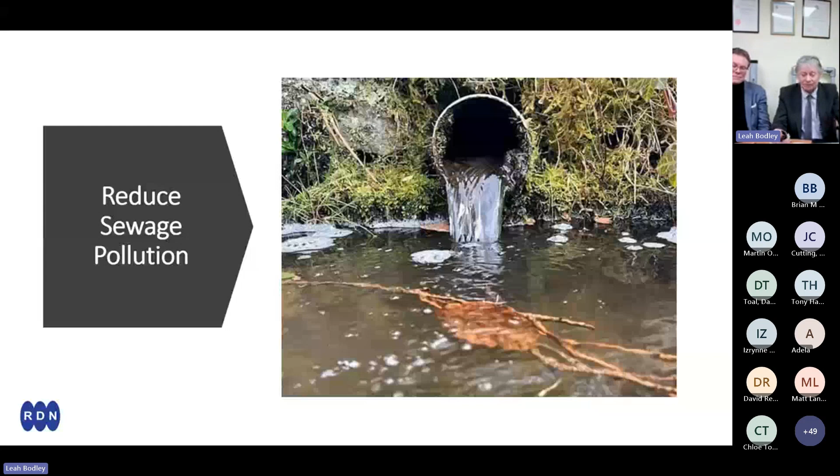So we wanted to find an effective and inexpensive way of controlling and managing flows into the network, which didn't include large capital construction such as building pumping stations with wet wells, etc. One key concern, very prevalent at the moment, is the need to manage and, if possible, reduce sewage pollution. There's an Act of Parliament in motion, with water companies having to focus very carefully on how we manage and control what leaves the CSOs, combined sewer overflows, and we're looking for all ways and means possible to reduce the operation of overflows that are affordable and effective. One means of achieving that is by putting flow control valves into the system.

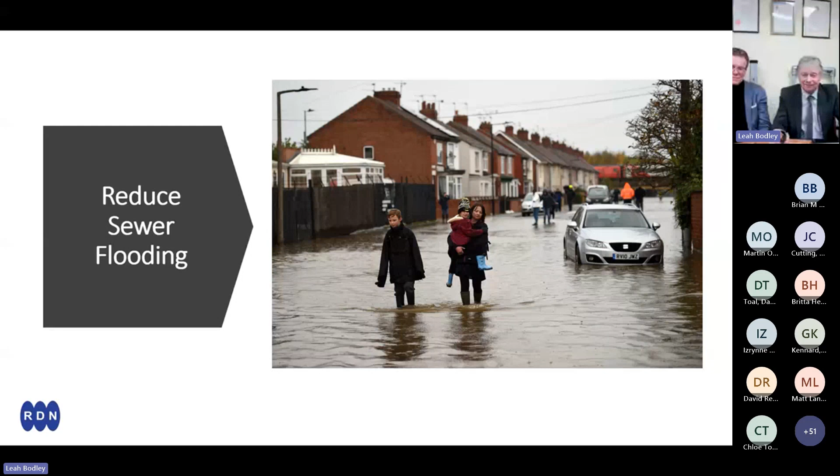A secondary benefit is if we can reduce or manage flow better within the sewer network, potentially we can reduce and better manage flooding. Flooding is very, very important; we want to reduce that wherever possible. And with climate change and the difference in weather patterns over recent years, it's something we have to keep front of mind.

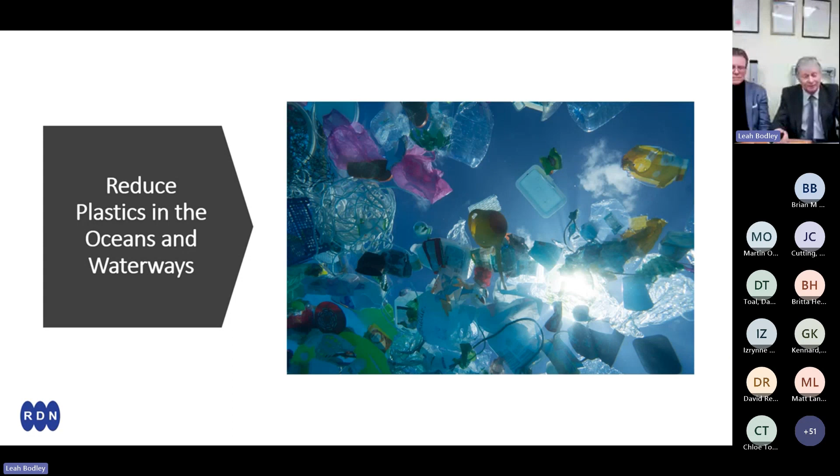One further issue we have to consider is what passes through the sewer networks in terms of things like microplastics, inorganics, organics, pharmaceuticals and other things. The ability to control and manage the flow in the sewers can mean that we can contain and curtail the operation of overflows, preventing some of these pollutants leaving the system and passing them through to our works for capture and treatment. That's a serious consideration. Ultimately, what we want to do is improve water quality.

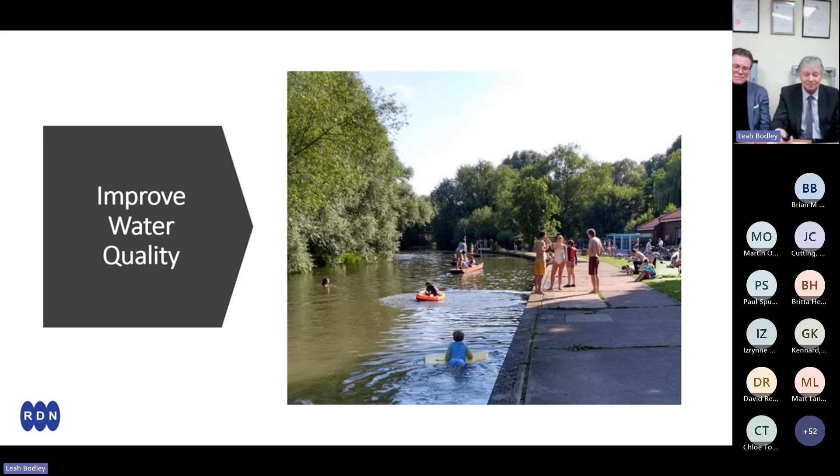We've worked with groups across the Anglian region, and the intention is to better manage our sewers where possible with low-cost, effective solutions to enhance the environment, particularly collaborating with the users of rivers and bodies of water so that they are aware of what we do and how we do it in a better, more sustainable fashion. The state of play within water is that in 2020 sewer CSOs operated more than 400,000 times, which isn't a great state of affairs.

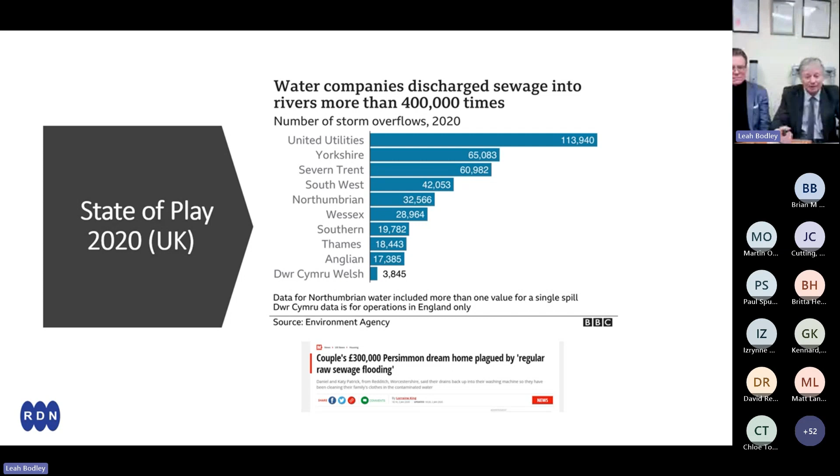However, as they are necessarily release points for the flows in sewer systems, we don't have any alternative, but we can do better in terms of controlling, managing things like first flush component and keeping a lot of the contaminants that otherwise might escape within the system, and the control valve arrangements that Brian's come up with can help us achieve those end goals.

So the particular case study of interest that we have is a place called Burnham Road at South Woodham Ferrers. It's a small town, and the case in point was that there was a development of a commercial and healthcare arrangement where we have an Argos and Sainsbury's being built, which obviously gave rise to an increased flow from that catchment, subcatchment, into the existing main sewer, which was already hydraulically overloaded.

The valve was a very suitable and appropriate way of managing and controlling flows, and Brian was asked to investigate the opportunities to site and locate that valve, design the valve to suit the purpose, install it and make it operational. I'll hand over to Brian, who can talk about the design challenge.

Well, thank you, David, for setting the scene. As David mentioned, it is an absolute challenge, and what we're up against when we set these sort of challenges are we have to make everyone, all the people in the industry, happy and content that what we're going to do is not going to make a bad situation worse.

And also, if you look at the ingredients to make success out of this particular project, we've made it akin to a cooking bowl. You're putting the ingredients in the bowl, and these are basic things that you will need to make sure the project's successful. Obviously, the overarching thing is it has to be affordable. And affordability comes out of how we implement the design, so how we approach this whole concept.

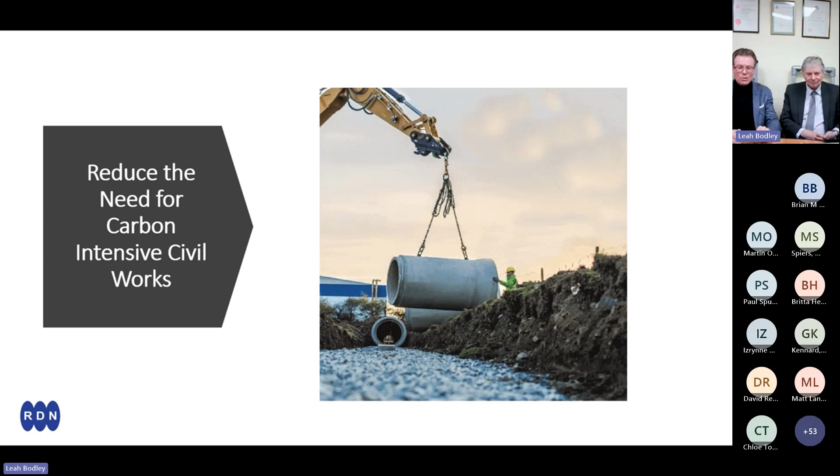One of the key things also is not to go down the route of civil works, because it's easy to say, oh, just make sewers larger to take all that extra load. But even if you did all of that, apart from the carbon intensity of doing that particular part of the process, you then move the problem to the works, which then cannot cope. So it's not a simple solution.

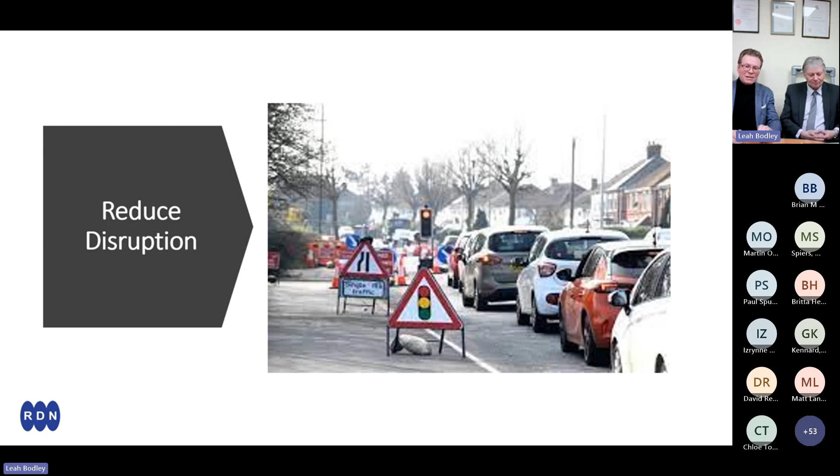What also is key with these types of projects is to implement a design where you don't create disruption. What you don't want is lots of days of civil works, digging up roads and so on, to put new sewers in or new chambers, because that's very expensive and also causes bad relationships with neighbours. One of the key elements also in this design philosophy was to eliminate the need for overpumping.

Now, David mentioned South Woodham Ferrers as an example. When we actually arrived first on site, the chamber had already been constructed, and this was a sort of an afterthought. Before the store could open, the flow had to be controlled. So it was a case of installing this equipment in a live working sewer without having to overpump and bypass, which is very critical.

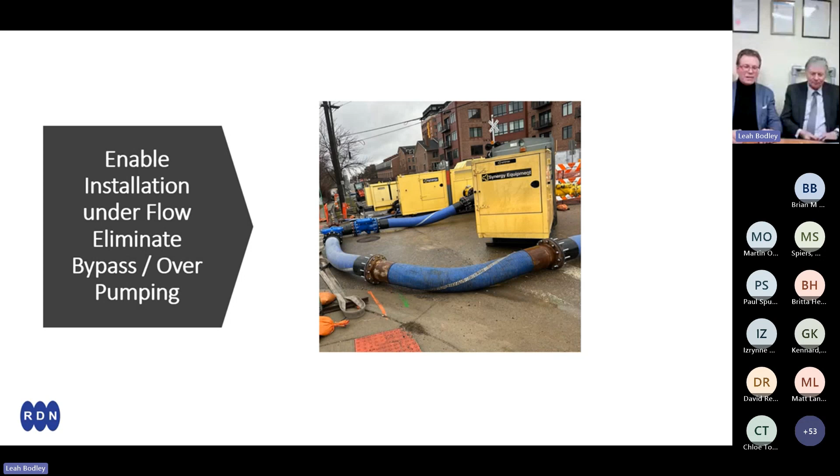And also with the design philosophy, we had to make something very space efficient, because if you start occupying land and territory, you're going to then reduce the space available for affordable housing. So there's lots and lots of constraints coming out of here.

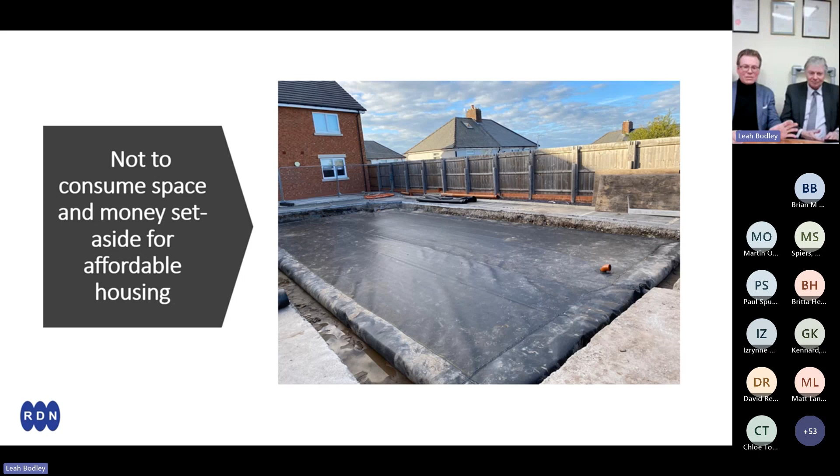The current thing, of course, which has occurred since we started this back in 2018, is low carbon. This has become even more so, and that covers the entire process, from a cradle to grave philosophy, from the design, the manufacture, the installation, the operation, right up to the end of life.

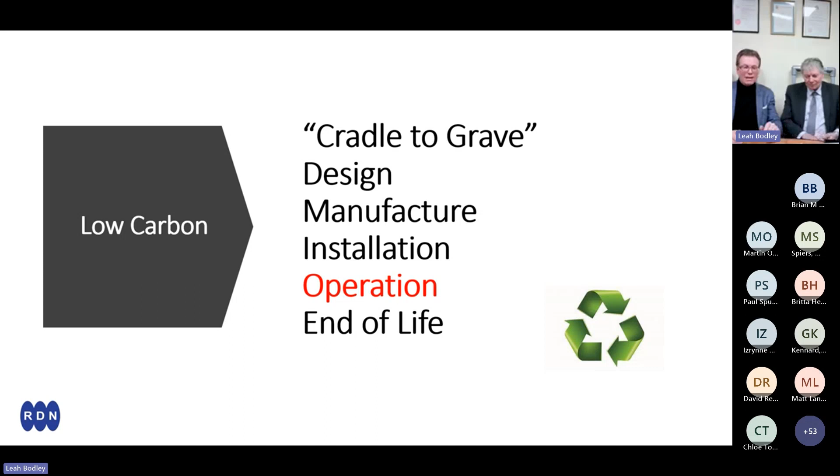And what goes hand in hand with this, which is one of the learnings we had from one of the previous projects we built for Anglian Water, was the need to eliminate mains power at the point of control, and also the point of sensors. With the first ever regulator we built back in 2018, we found one of the biggest constraints was getting mains power to the location of the kiosk.

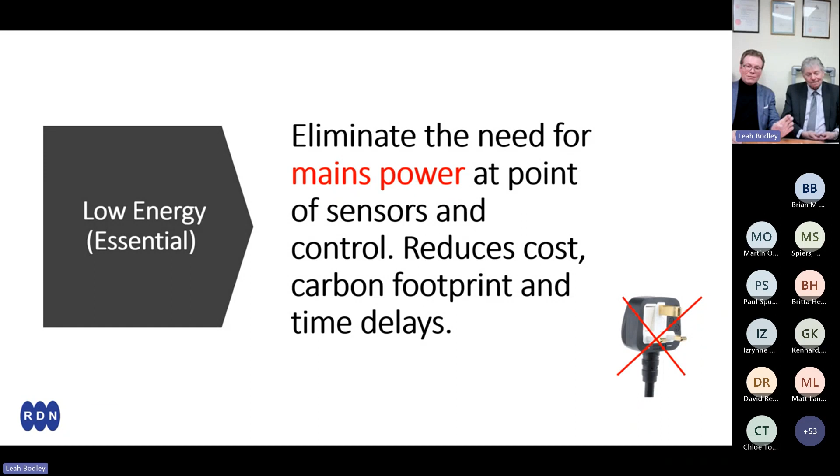So this was a major constraint we've addressed by making everything, as you'll see later in the presentation in the demonstration, solar operated. So it means you can install these types of interventions anywhere, and actually then have a long-term low carbon footprint in operation.

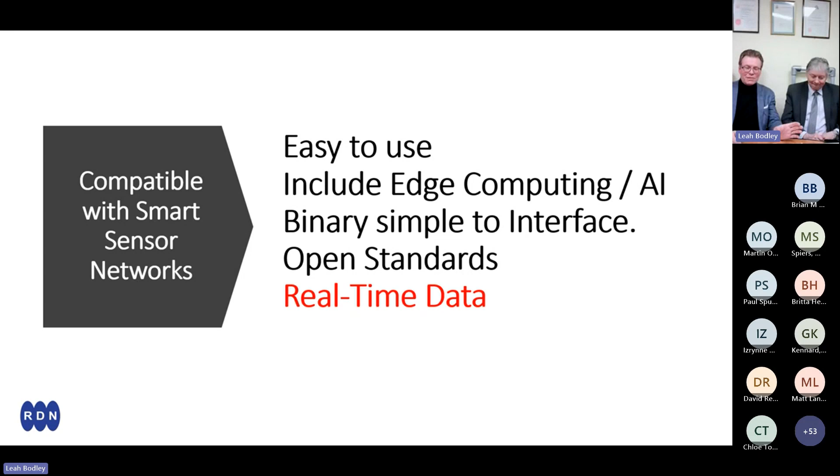One other key thing is everyone talks about AI and smart sensors. The means of control, when the level is high in the sewer, you want to inhibit flows, restrict the flows and so on. One of the key elements is, of course, in red at the bottom. You need real-time data, but also you don't want to restrict what type of sensors used. Sensors are in evolution, so it's an open standard for the control method that can control this type of regulated device we're going to talk about.

And the final thing, it must be fail-safe. The whole design by its nature has to be fail-safe. If something was to go wrong, you must not make the situation worse than it was.

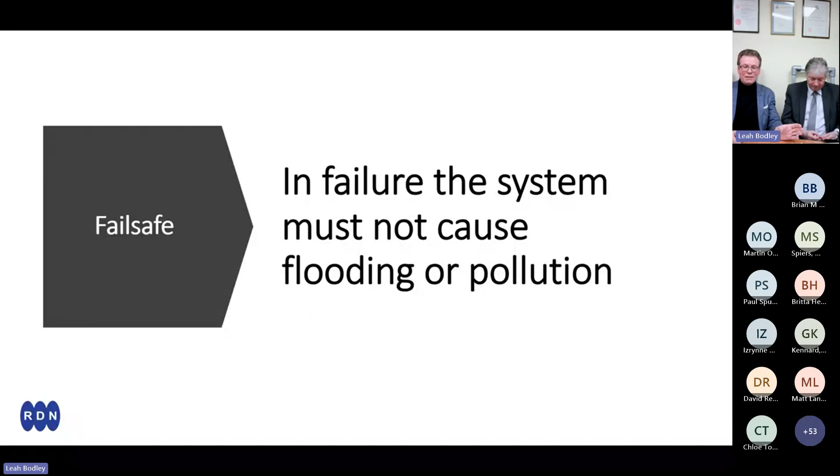And intrinsic safety goes without saying. Where we have high septicity, there could be a potential risk of explosive gases in the sewer networks, so ATEX, or UKEX as it's called now, has to be considered. Cyber security is also important, which leads on to something we're going to talk about as well.

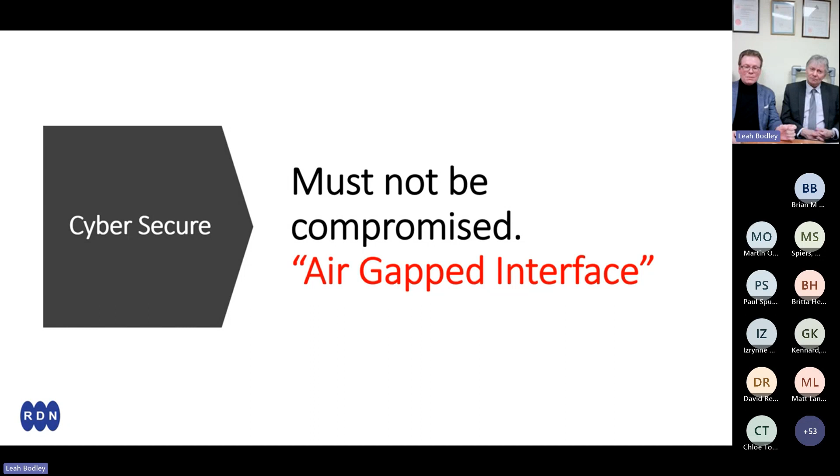The system needs to be autonomous in operation, so it's not dependent upon the internet, which also gives you a guarantee of longevity, because technology will move on. As you would see in the cellular networks, you can't rely on a thing to be static for very long. But if you make an autonomous system, you have the ability for it to operate on its own from now and into the long distant future without the need to change too much.

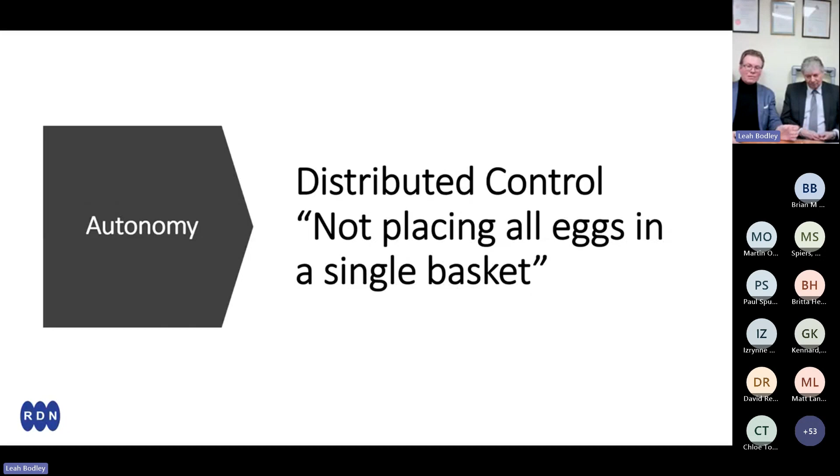As I would say, don't put all your eggs in one single basket, because you don't have a central control. Have a distributed control at the point in the network.

Another thing that's very important, and it has always been stressed to us, is the minimal need for maintenance. This is something we've tackled. We've reduced maintenance because the actual device, you'll see in a moment, is a self-cleaning product, but also it has the ability to be removed from the network without the need for confined space entry for cleaning and test.

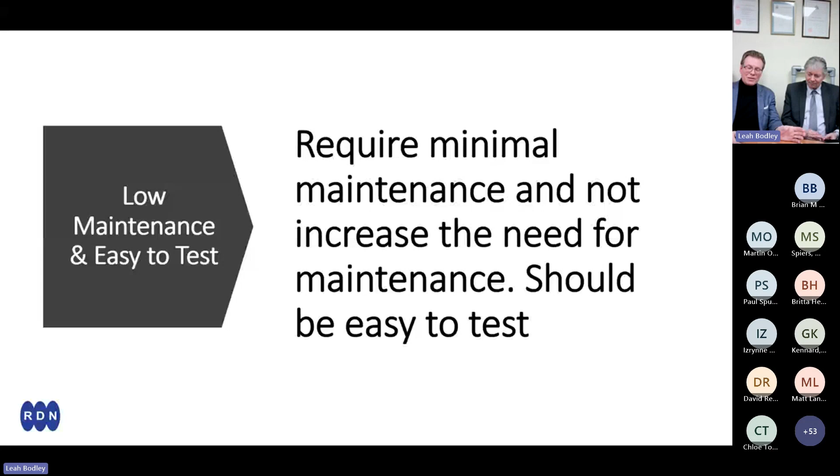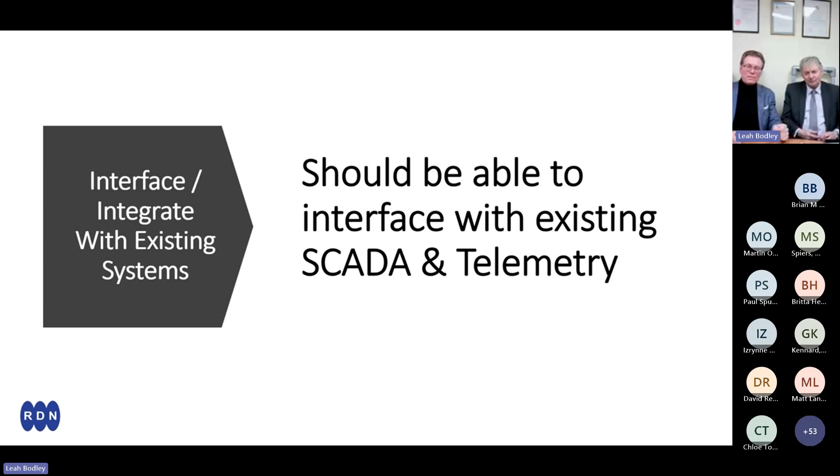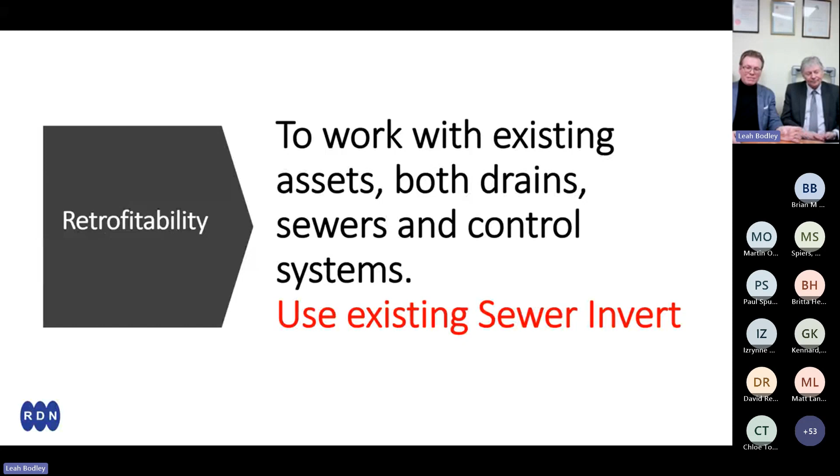And finally, we have to interface with existing SCADA and telemetry so the utility can get feedback about the operational status of the device. And what goes without saying, retrofitability, as in the case study David just mentioned about working with existing systems, is key, because this was already built as a sewer network. We had to retrofit into the existing sewer chamber.

So I'm introducing you now to what we call the wastewater flow regulator, but most people in the industry seem to call it a sewer flow regulator, which doesn't particularly matter. It has actually been granted a GB patent back in 2022. And the theory is as follows.

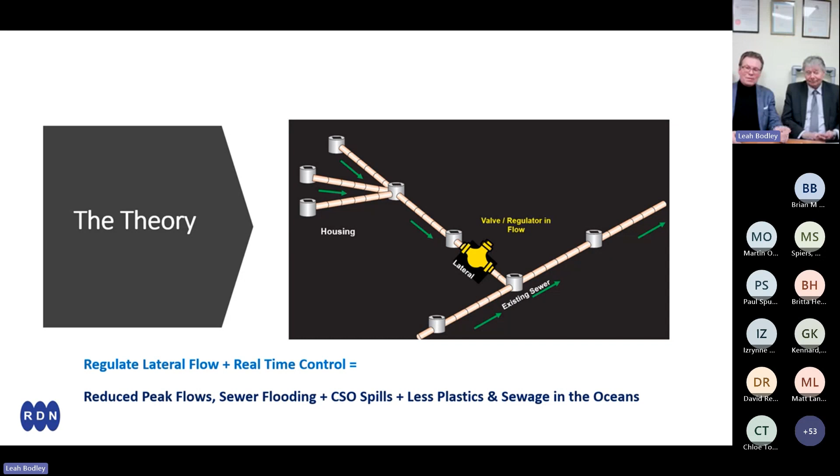So if you took the example of the Southwood and Ferrers development, where it says up on the left-hand side housing, there's a picture in the yellow of a regulator valve. You've got the point to open, you're then restricting the flow back into the main sewer. And this is the actual part that fits into the sewer - this is the sewer flow regulator. You have a body at the top, which is placed into the sewer over the benching and the invert.

One of the key elements here was that we didn't want to be invasive. We didn't want to create any issues about the potential for ragging, so no discontinuities. This is where we differ substantially against a penstock, which would require a frame and a new chamber and a weir wall to be created.

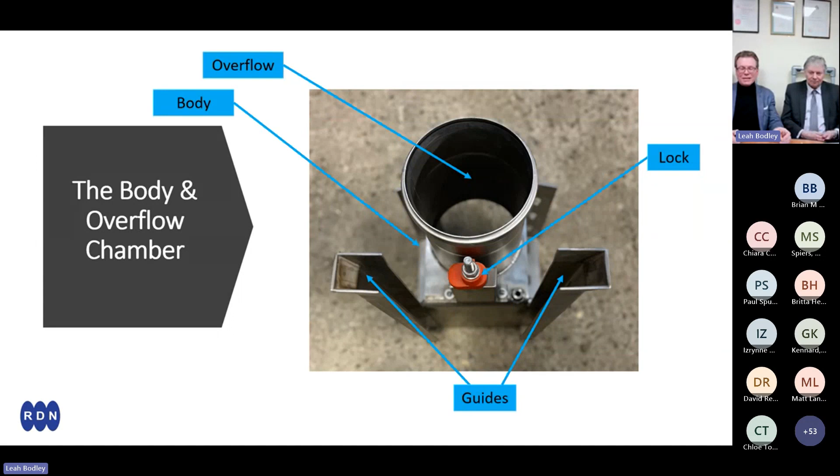This actually utilizes the existing chamber, the existing invert, the existing benching, and is designed to fit the actual existing chamber and the benching and so on. It's got two guides in there, which let the control element, which you'll see in this picture here, be inserted and removed for servicing too.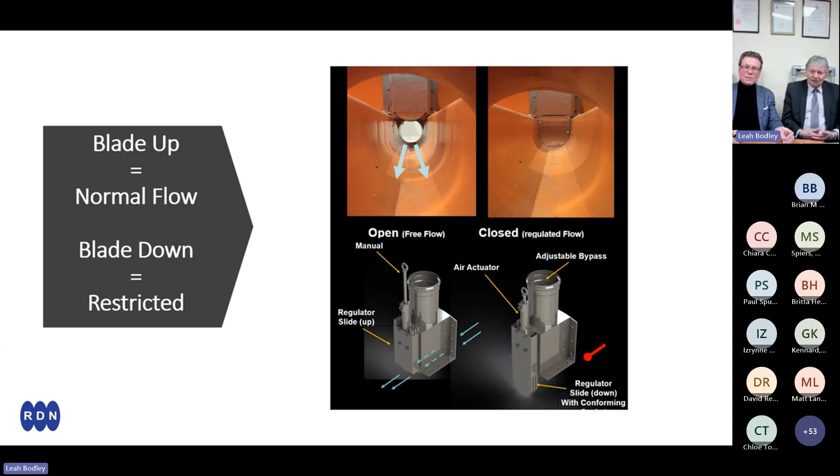As you can see, it's like a tongue that's gone into the invert, and it's actually using the base of the invert as part of the seal. So blade up, open flow; blade down, restricted.

Now, we mentioned the need for solar. That's absolutely paramount, and that's been used on the majority of the flow regulators installed to date. It gives the ability to install them virtually anywhere.

The only constraint is you don't want to be overshadowed by trees or tall buildings. But inside this particular control kiosk, you've got the solar panel at the top, and the sequence control that actually controls the operations of the actuator underground in the chamber. This one includes radio telemetry, which talks to and from the wireless sensor down in the network, and also back in this case to Anglian Water's telemetry too. It also has manual local controls, so you can test the unit on site as well.

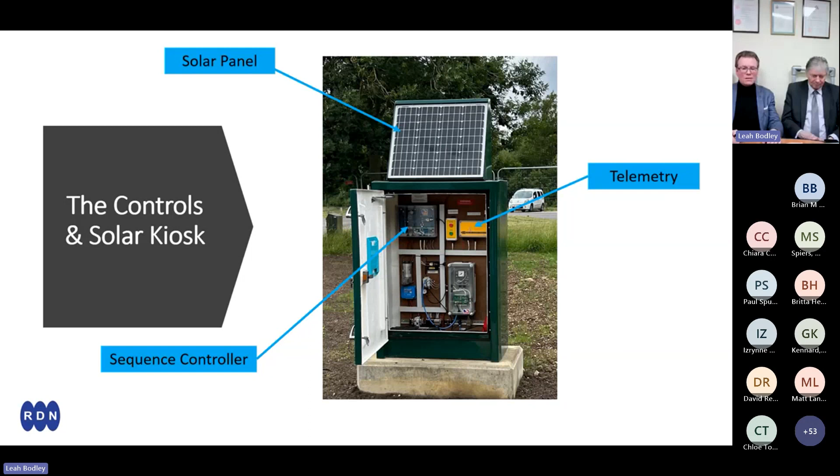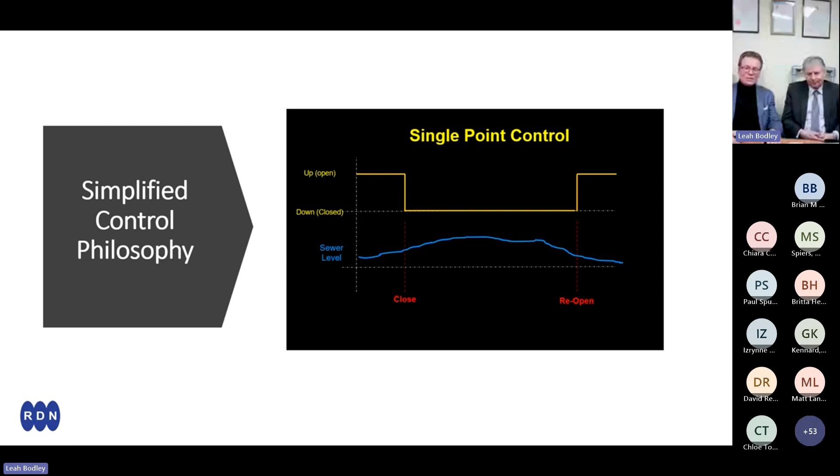If you look at the control philosophy, it's very simple. Take the case of an analog level sensor, such as a Vega radar in the sewer, perhaps a kilometer away. Radio telemetry would bring that level back to the control point in the controller, and a threshold would be set upon which the regulator blade opens and closes, inhibiting or enabling the flow. In the open position, the flow is enabled; in the closed position, the flow is inhibited.

So if you look at typical system topology, on the right-hand side you have a level sensor. It could be any type - the system is very agnostic. It could be a float switch, a velocity sensor, or a higher level radar with a trip amplifier. It can be any type of sensor; it's completely agnostic.

The flow regulator could live several kilometers away at the actual point of the new housing development, for example, or the new industrial or commercial estate. The control point is then implemented to reduce the flooding potential at the hotspot.

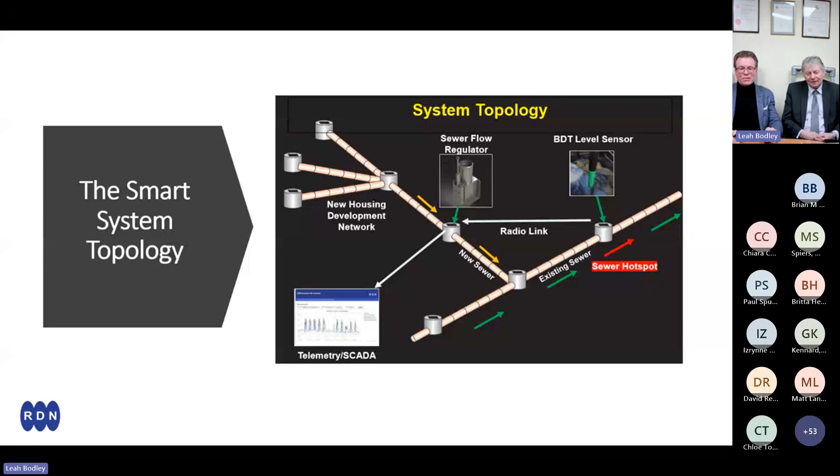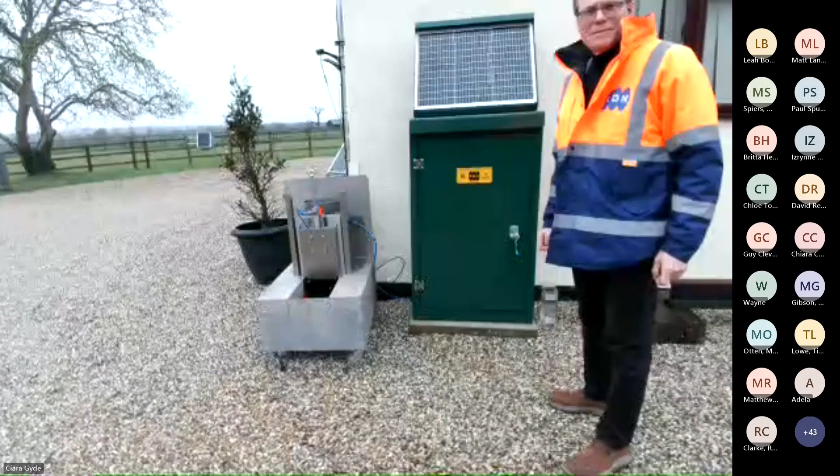Okay, well welcome back to the Innovation Farm. As expected and predicted, it's raining again. And we're going to start off with just showing you typically what the installation would look like above ground. This is a typical solar kiosk, but excuse the rain of course. And this is basically inside the one you saw in the picture earlier.

What we're going to do, though, is actually run a live demonstration, because it's a little bit more challenging - inside our innovation barn using a flow rig to simulate an actual flow regulator. So ignore this for the moment. We're now going to go inside, so follow me through with the camera.

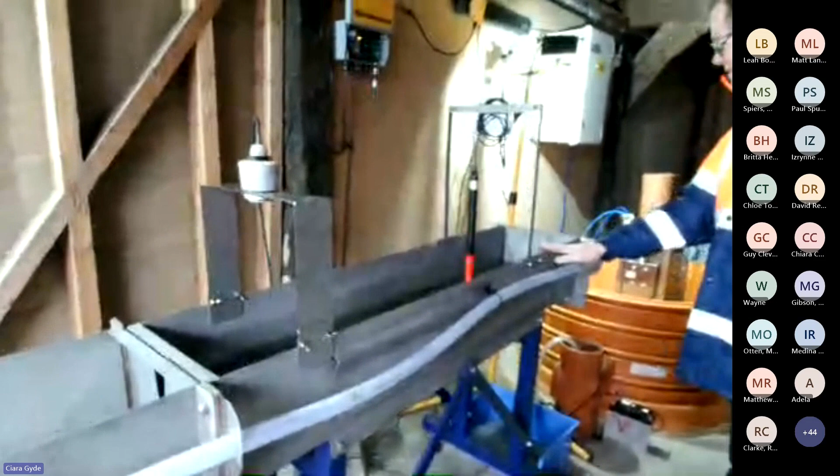Innovation test rig area. And I'm going to introduce you now to a - so this is going to be our main sewer, which has a capacity problem. We'll start a little pump here to illustrate the fact that the sewer level is rising.

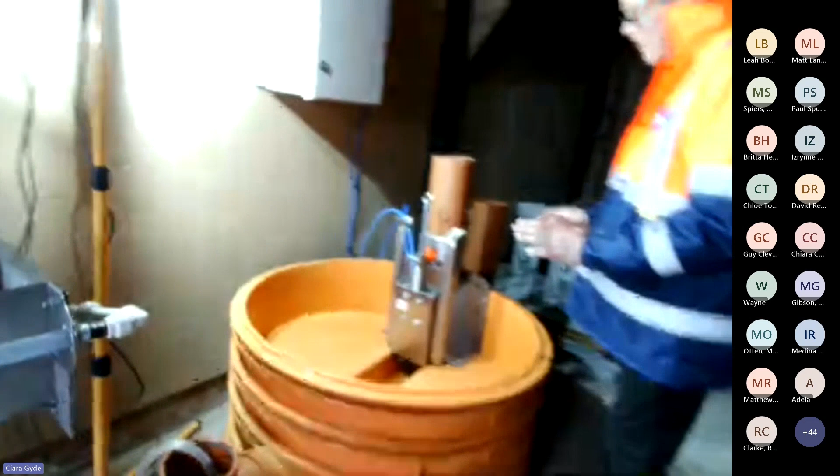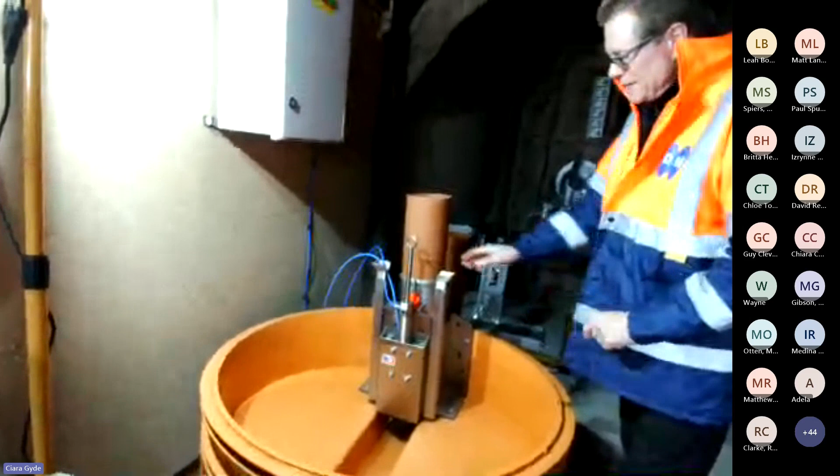So this is going to be our main sewer. Over here on the right is a flow regulator. This is a 150mm one, actually built into a plastic invert for ease of demonstration, but the inverts can be concrete too - they don't have to be plastic by any means. This one will actually show you how it's built and installed correctly.

And what we're going to do is show you how this system works as a real live demonstration. So we've taken the controls out of the green kiosk and shrunk it into the compact version, which is the one we use if we're going to install the controls inside someone else's kiosk. If there's an existing kiosk by the side of the road, they can go in there too. So it is actually quite a compact installation.

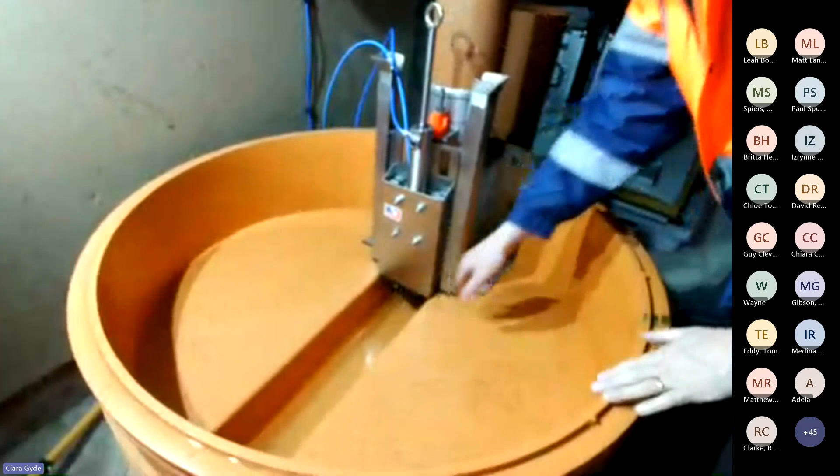What's very key about this installation is the flow regulator sitting over the invert. As you can clearly see down here, there's no discontinuity, nothing changes itself. So the chance of attracting rags and so on is minimal.

We're going to just make the demonstration more realistic here, because what we're going to do is put a flow on in our sewer. You can actually see we have now a flowing sewer. Obviously, as you can see, the flow is going through here unabated. You have an overflow pipe here should things go wrong, so this is cut off to the height of the store point.

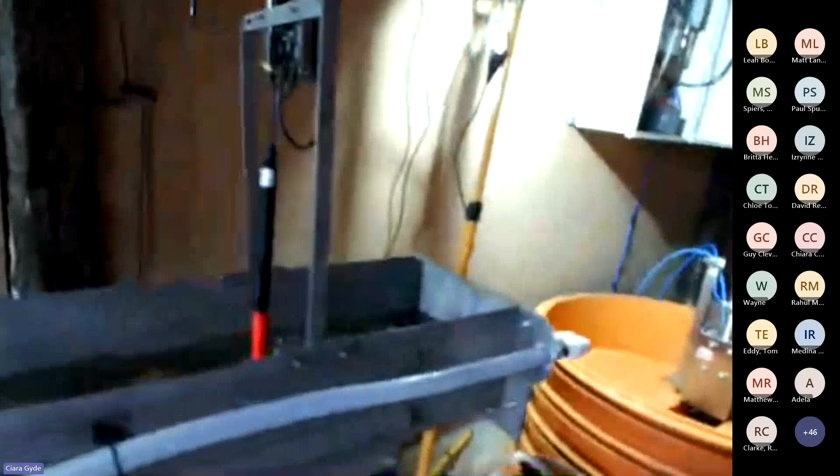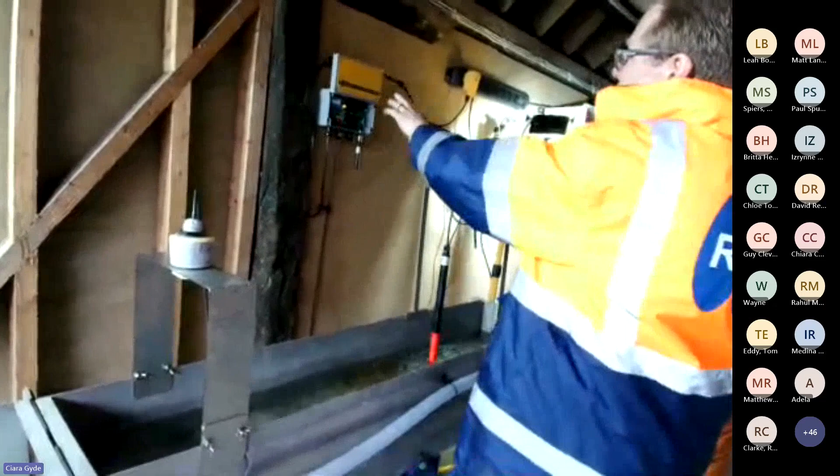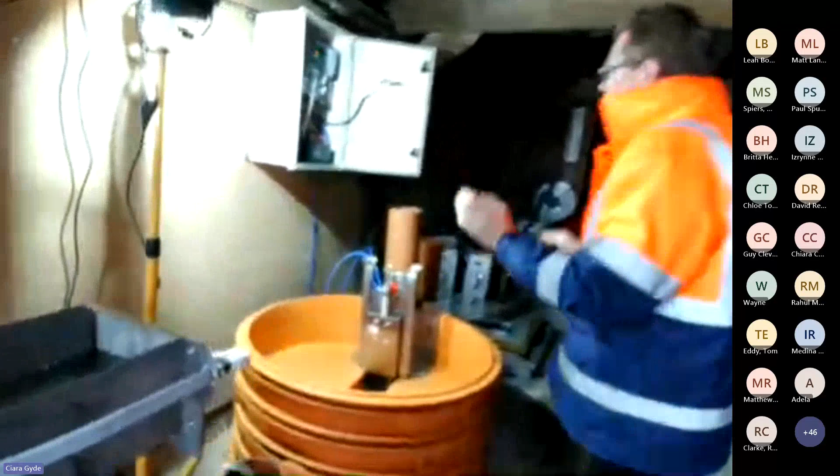What we're going to do now is let the sewer level on the left-hand side rise. What we have in the sewer here could be any type of sensor, but first we have a Vega level sensor connected to a radio telemetry transmitter. Every time you see the blue LED flash, it's taking the latest level and relaying it wirelessly back to the control kiosk. Technically speaking, this can work up to 5 kilometers away. The level's been reached now.

The level in the sewer has reached the threshold. The green light that was on here has now gone red. What you see now is the flow has been restricted by the regulator, which has closed in the invert and is sealed. Now you can hear my little electric pump running dry because it's been starved of water, so I'll switch this off here.

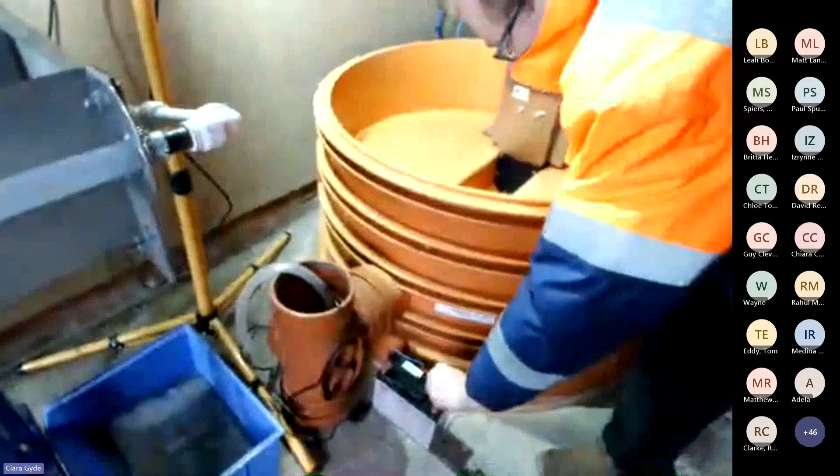Now what will happen is we'll ask the team over here to switch off the pump and let the level recede in the main sewer. Just imagine that the rainfall event is now finished and the level is going to gradually drop.

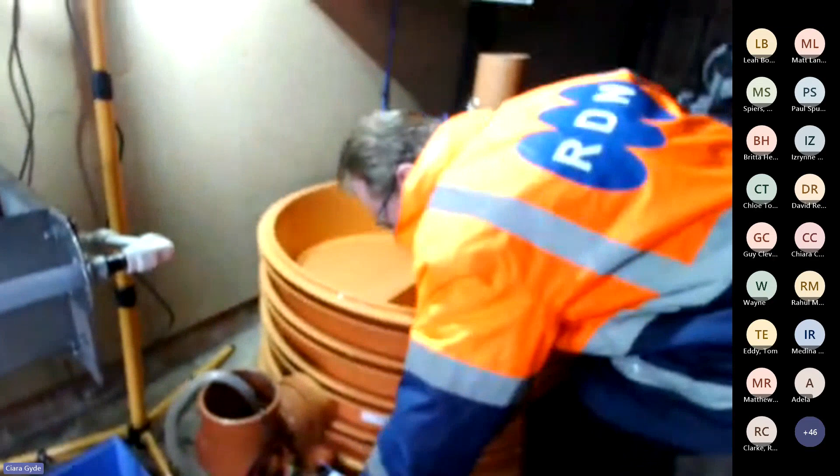As you can see, the flow was retained and now has been let go, so we're back into a flowing system. We can run around the system again, and you can see now we have an unobstructed flow path.

But what you've also got is the ability, when this is in the raised position, to remove it for service from the surface. You have a long key and two hooks that go either side, and you can lift the regulator clean out of the actual frame. The frame stays in place, meaning you can service this from the surface. This works particularly well in shallow chambers up to 2 meters - you can lift the regulator out and lower it back in for service and maintenance should that be needed.

The other key point, which is part of the patent, is the fact that if this was ever to get stuck, you have the overflow weir here, which is a standard piece of plastic pipe cut off with a spill point. You cannot surcharge upstream should anything go wrong. So that's basically the system in action here.

This is the flow, and we can take you outside again if weather's permitting.

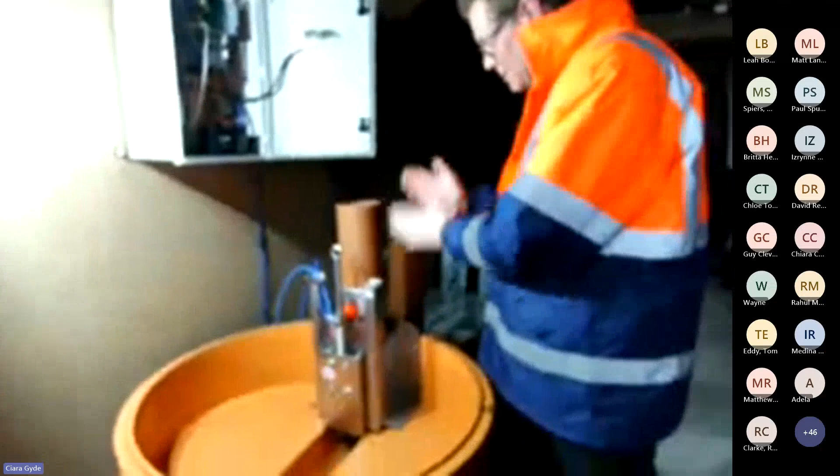My colleagues quite rightly reminded me - we have been asked, can this be used for flushing? And indeed it can, because as you saw, if you close it in this flow and then reopen, you get a flush, which is great for first foul sewage removal. It helps to reduce that particular problem, so you do have an extra benefit of having the system in here.

Alternatively, this blade doesn't have to be a full seal, it can be partial. About 50% of regulated designs that are either proposed or installed aren't restricting the flow totally - they're providing a partial stop. People have said this is a better and safer alternative than using a hydro brake, which for small sewers could be quite small and is liable to clog. So there are certain aspects and benefits of this design above and beyond what we originally conceived.

So if we walk back outside, weather permitting, we have a second live demonstration.

This is using the kiosk outside, and this is totally a solar powered operation. This has been out here for several months, waiting to be demonstrated just to prove the point that solar is very viable, even in the UK. In fact, most of the systems we have out there in service since 2018 have been running successfully on solar.

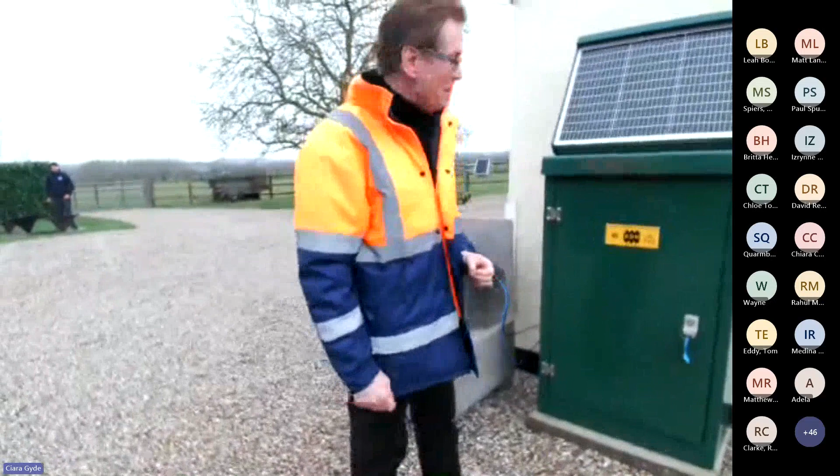I'll open the door briefly because of the rain, of course. I've got a colleague over in the chamber over the distance yonder, and he has got a float switch. We're raising the float switch up, and that has now been relayed by radio telemetry to the chamber.

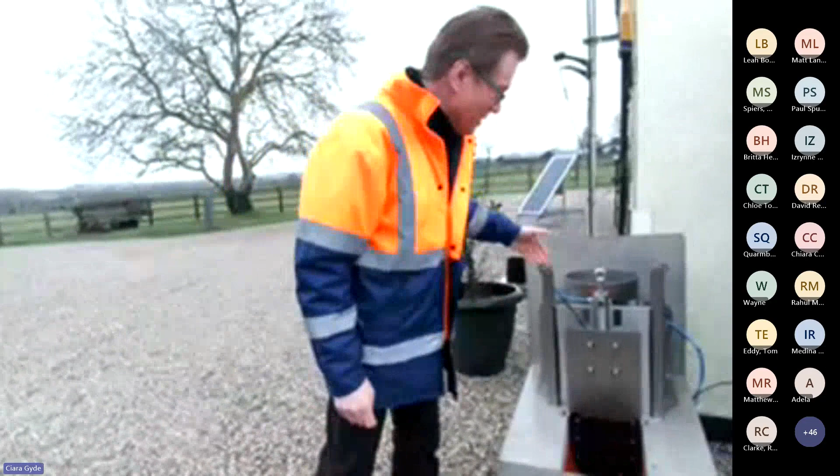That now goes to the regulator, which has now actually got some water in it thanks to the rain. So this was going to be a dry demonstration, but it's now a wet demonstration. We've actually got a level in the chamber.

This is a larger model than the one you saw earlier. That one was a 150mm unit; this is a 225mm, exactly the same principle, same scale. Important to note is the shape of the back wall - this one's a square back wall, that one's a different back wall. But we actually custom manufacture these to order to suit any back wall or any angle as they come out.

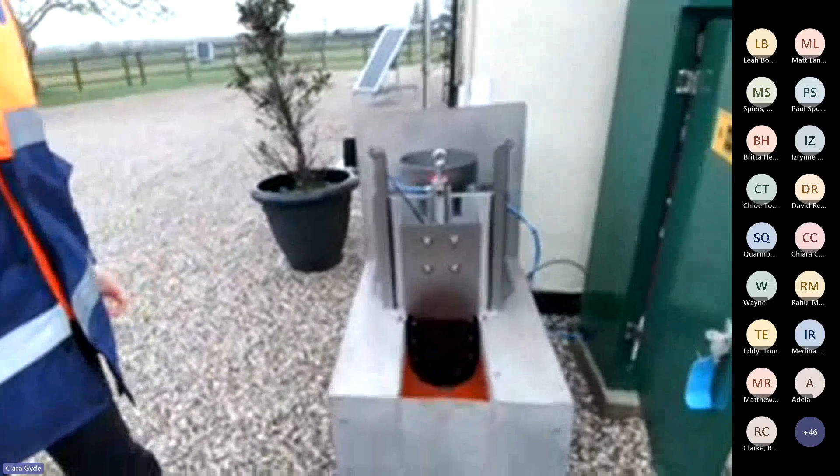If you could kindly lower the float, please. So we'll have the regulator open again. There's always a small delay waiting for the telemetry to work. There we go - you can hear it click over in the control kiosk, and it just takes a few seconds, and then the regulator blade lifts.

So as I said earlier, it doesn't have to be a full closure - it can be a partial closure. And the larger the invert, the better they are when it comes to using partial closure devices. As you can see clearly here, perhaps clearer than the version inside, what we have is no obstruction whatsoever in the actual invert.

That's very key. Now that really ends the outside demonstration - a live demonstration that actually worked. Often with demonstrations, whatever else happens, something always goes wrong. Today, apart from the weather, everything went fine.

So thank you, we'll now move back inside. Welcome back, I trust you saw the live demonstration outside. A little bit wet now thanks to the rain, and a little bit smeared up on my glasses, but that's one of those occupational hazards with the UK.

What we are going to do now is move on to - we have a slight technical hitch. Okay, the mouse is now working.

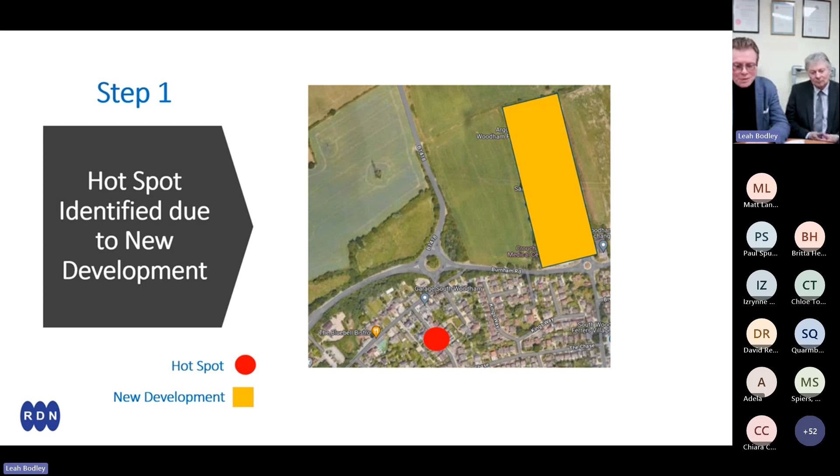And you have this sewer hotspot. We've illustrated earlier that radio telemetry can be used to control the regulators, and indeed it was in this application. It's about 1 kilometre as the crow flies between the hotspot, in inverted commas, and the housing development. So if you're planning this type of intervention, the first thing to do is identify your hotspot and then work out where you want to put the controls.

One thing that has to be emphasised with this new development is that Anglian Water were fortunate to get in early on this development to actually specify or suggest to the developers that they build these sewers with slightly oversized pipes, because apparently laying 300mm sewers compared to 150s was negligible difference in cost. Obviously, you've created larger capacity by doing so straight away.

And then the challenge is restricting the flow on the outflow. The options of having orifices and hydrobrakes and so on weren't viable, so we're back to where the regulator comes into its own.

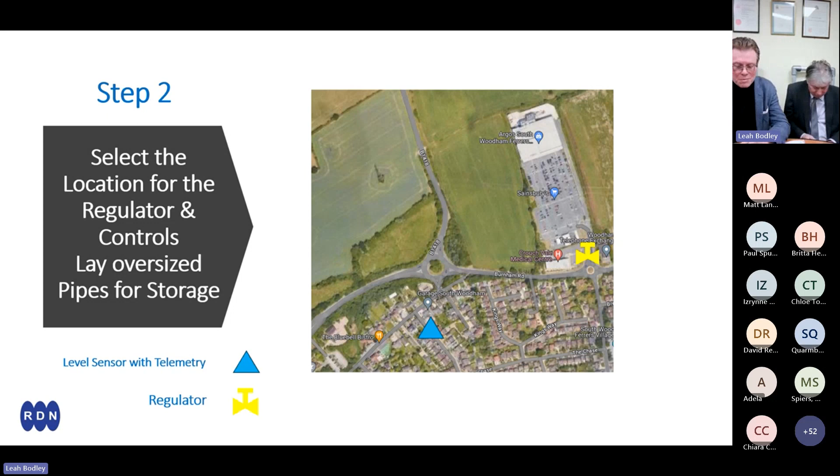So you can see in the illustration here, we have the yellow valve symbol illustrating the point where the site exits and joins the main sewer, and the blue triangle indicates where the actual sensor was put into the network to determine the level.

The challenge then, if you take this as a sequence, is you have to measure and obviously find the actual - first and foremost you have to make sure whatever you design will fit through the existing covers, which is typically 50 centimeters. That's your first overall constraint.

But the main constraint and challenge is actually fitting the invert, because as you can see, every invert's different. It's not as straightforward as the illustrations you've seen earlier in the demonstration. These are not perfect inverts by any means.

So the things you have to gather: make a template of the shape of the invert, so someone will have to template it. You have to determine the angles and also the position relative to the actual chamber, because more often than not the actual inverts will not run necessarily through the centers of the chambers - they're slightly offset, or can be. Also, the angle at which they enter and exit may not be at right angles to the chamber, but all of these can be taken into account with the design.

The final point is to determine the critical height you can tolerate if something should go wrong. As I showed you in the demonstration, the overflow pipe is set at the height where you cut it off to prevent spills and surcharges back upstream. So these are things you need to gather at this early stage.

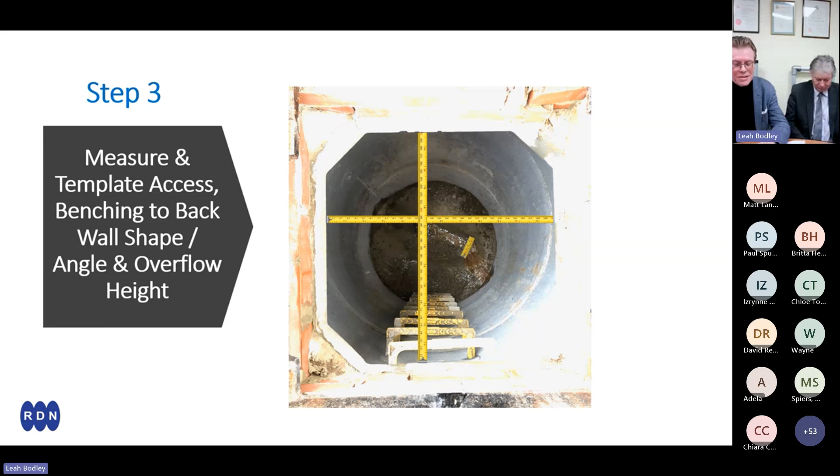The next step is to prove that the control point is viable too. Can you get a radio telemetry link back from the point of control? That requires a field survey where you put up a test transmitter, measure the radio propagation across the link, and measure the signal strength received at the control point to prove you can get a real-time telemetry link. One thing that's not very viable is relying on cellular networks, because you need that point-to-point direct communication link, preferably something very fast.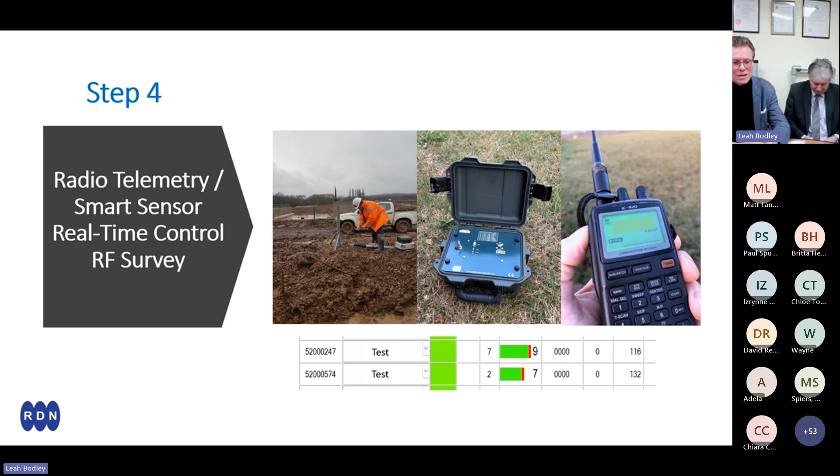What you don't want is 15-minute data, because that may be too slow. Preferably you want minute-by-minute data, as you've seen in the demonstration, where we had a live feed from the radar sensor. So we take all that information on board and then produce the actual design.

Each regulator is slightly bespoke. As I mentioned earlier, the benching will be different heights, the back walls will be different, and the curvature of the chamber is different. Some have square walls, some have flat walls, and so on. We have a number of techniques to take out all the undulations of the back walls.

These include what we call compression rings, which give the gaskets compression points, similar to cylinder head gaskets on cars. We can apply the same approach to the benching, taking out most of its imperfections. Then we have a technique we call benching ears—a funny term we've coined recently—which modifies the bottom of the chamber to remove imperfections where someone's hand-benched it, and lets you fill in that tiny top corner, because otherwise you'll get too much leakage past the regulator.

What's really key is that the whole design can be modeled in 3D and offered up to the customer for approval, so there's a check, cross-check, and so on. Using this philosophy has meant that every single regulator we've produced so far has fitted first time—not just through the chamber, but also snugly onto the benching first time—and that's been very important.

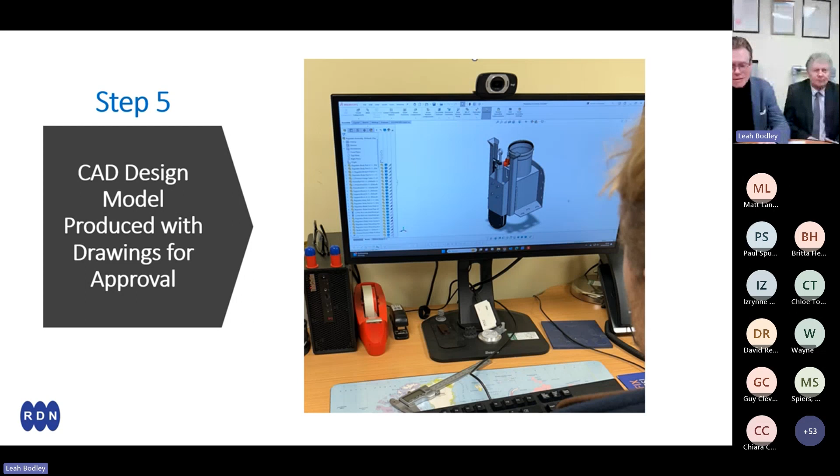The manufacture stage is the next part of the process. So we assume now the client has agreed—they like the fit, the concept, the design, and feel it's going to do the job for them. The regulators are then fabricated, actually fabricated in Essex with steel fabricators using coded welders.

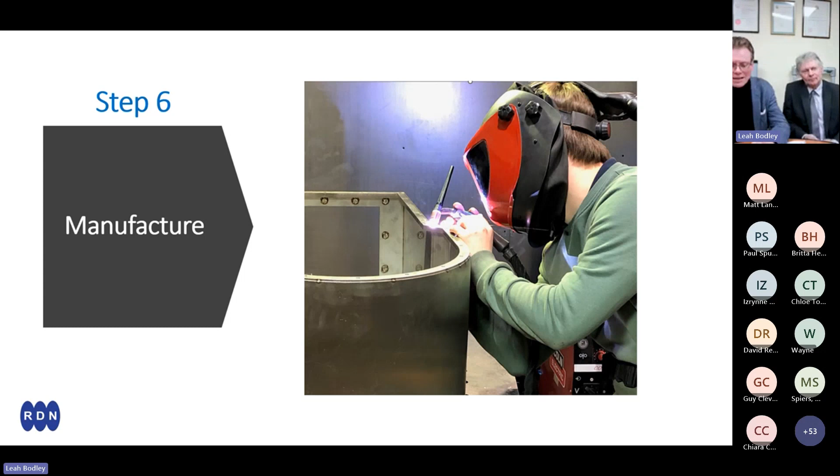All the products are made in stainless 316 or 304, depending on the type of sewer we're dealing with—304 for surface water, 316 for foul sewers. Once welded and so on, they're tested and ready for installation.

The important part, of course, is then to install the kiosk in parallel. You saw the kiosk in the demonstration outside, and that only requires a duct to carry two air lines back and forth to the chamber—one air line to drive the actuator up and one to drive it down. So that's the only requirement; you don't actually need a duct to carry mains.

So it's not necessary in many cases to dig the duct very deep. So you don't have to go to 18 inches because there is actually no power in the chamber required at all, which is another benefit we perhaps didn't mention earlier. And simultaneously, whilst you're installing the kiosk, you can also fit the level sensor down in the network. And this, as I mentioned earlier, could be any type of level sensor. It doesn't require anything specific.

All the control kiosk requires is a closing contact to close and an opening contact to reopen the regulator. So it's designed to be agnostic. It could be any sensor. It could even be controls from telemetry. So if the utility has, for example, a model which is actually live and has indications that the levels are going to be high, you can actually preempt an event by closing the regulator using remote control rather than making it autonomous. So you have the ability to do both.

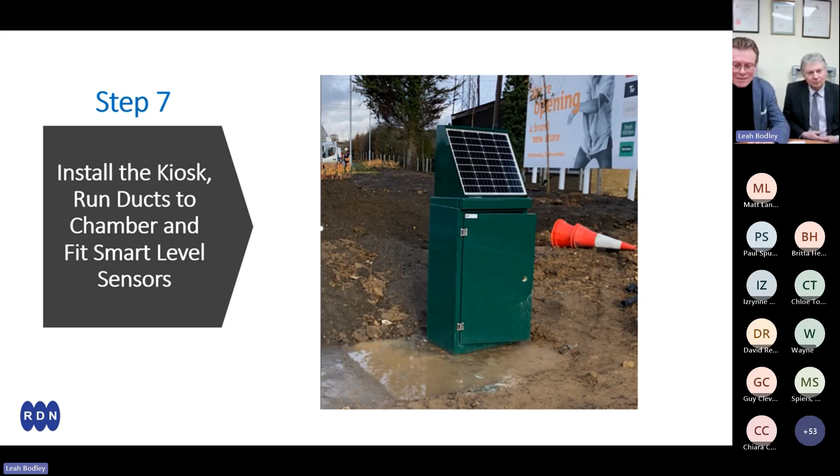This also means that the utility, should they wish to, can test the regulator periodically by opening and closing it and looking for the feedback. So there's a lot of extra features that haven't been mentioned earlier, which are coming out now during this installation process. If you look at the actual mounting now, this is in the early stages of installation. This is before the overflow pipe has been installed, but this is the actual regulator at South Woodham Ferrers.

As you can see, it's a slightly offset invert. The benching here was very, very basic and was corrected by the benching ears. And you can see here that it's been partially bolted down and air lines run into the chamber. So you can see the blue, which is the opening, and the black, which is the closing lines. And this one has got flow in there. So it's been installed under flow, no need to pump out, drain out, and so on. And it's about 2 meters deep, just to give you the context of the installation.

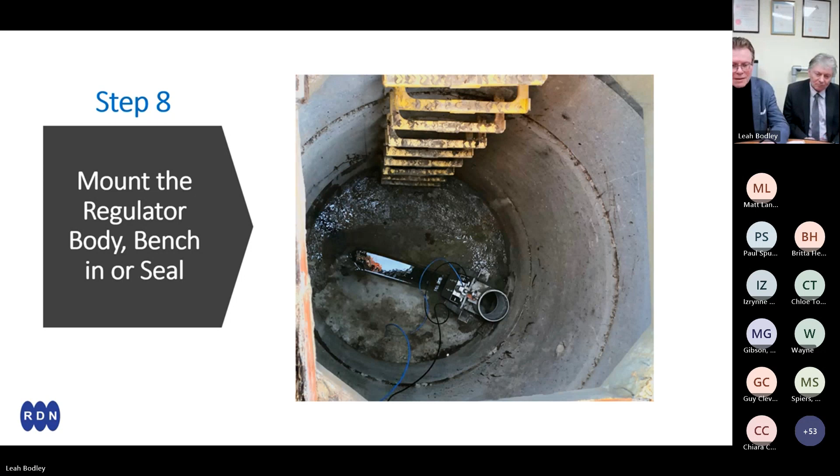The back walls can be filled and sealed using compressible foam gaskets, or alternatively using standard benching or mastic seals. Again, there's not particularly any hard and fast rule. So if any particular utility has a preference for whatever they use in chambers, then we can accommodate that too. The final part of the installation is obviously the test and verification. This is something that's obviously conducted by the utility. And you can see now the site has been cleared, the kiosk is installed, the system has been commissioned.

In the foreground of this picture is the little manhole chamber in which the regulator lives, and the cable duct is now invisible below the grass. And in the background, top left, you can see the large Sainsbury's superstore. Out of shot to the left-hand side is also a very large NHS walk-in centre as well, which are all served by the regulator. So that's the design, that's the principle, that's the installation process.

It is not that long compared to, for example, installing a penstock, which would have required a new chamber. If it was in a street, you'd have had to close the street, sink the chamber, build a new chamber with a weir wall, install the penstock, and most importantly, you'd need mains power. This did not need mains power. So this is a totally net zero, off-grid, autonomous system in its operation.

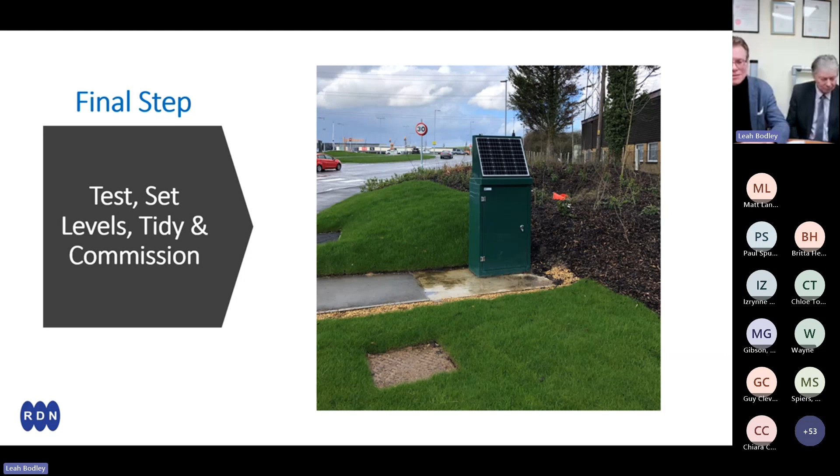So we now move on to lessons learned, and this is something myself and David will share in this particular session. One thing for certain we found from our personal experience was that all inverts are different and the quality of the benching varies tremendously, because when people bench an existing sewer network, it's something they don't really consider. All they look at is to contain the flow within the actual invert, so that anything that comes out of the invert will go back into the invert should the levels recede and not be left on the benching.

What we're trying to do is actually convert that curved invert top section, or the benching top section, into something square. So that's why I mentioned earlier we introduced benching ears, which actually square up the invert in the region where the regulator is. And the regulator in this picture is actually installed on a Y branch invert, but it is the same size as the one at South Woodham Ferrers. It just gives a better illustration of what I would call poor benching.

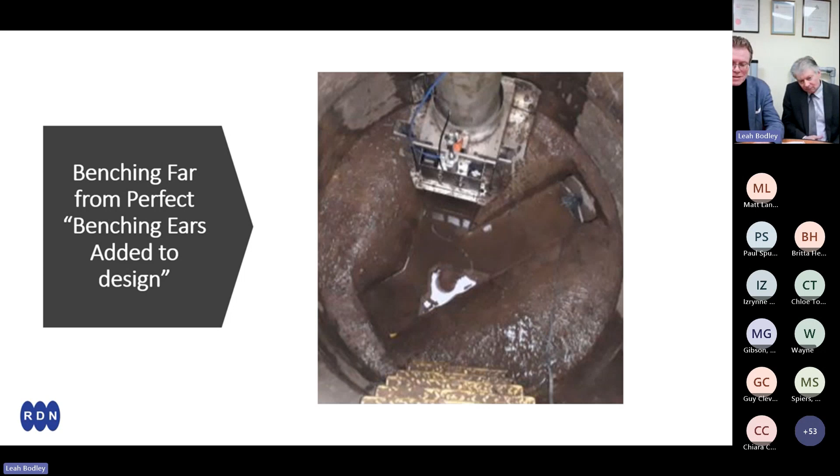That's one of our first learnings. And the second one really was that a lot of people are now asking for partial closures rather than full closures. And also they want to have a system where they can utilize some of the existing chamber to provide storage. So rather than mounting the regulator, as you saw earlier, on the back of the chamber, it's also equally viable to mount it on a weir wall within the chamber.

So should it ever overtop, it will not pour over the top of the regulator. So it will be in a controlled fashion. It will actually spill over the top. And the weir walls, again, could be built as high as you need to stop sewer surcharging upstream. David, have you got some observations you'd like to add to this at this stage?

Absolutely. The lessons. Obviously, we have fitted a number of these valves in our business, and to date they've been successful. They haven't caused any problems in having been fitted, and have done a good job of work. There are a few comments, however, from our operators regarding the robustness of the valves, obviously, and their longevity.

And we're happy to report that we haven't had any problems or issues in terms of any failures or repairs necessary. And as Brian mentioned earlier, they are actually relatively easy to remove and service, so that's gotten a good thumbs up from operators on that side. The concerns we mainly have relate to how they're operated and when they're operated, which links back into the smart networks elements.